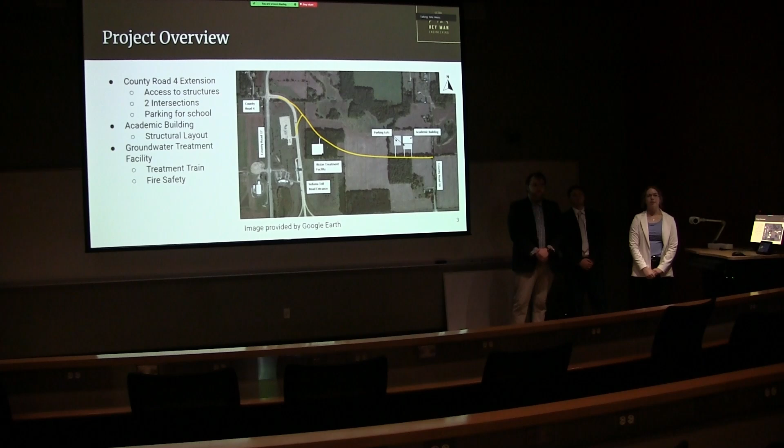And the environmental part of our project was to design a water treatment facility that could treat 1 million gallons of water per day. Included in this design was the treatment train and distribution to the fire safety system on site.

Beginning with the transportation portion of this project, my design was all in regards to the Indiana Design Manual, the AASHTO Green Book, the Elkhart County Regulations, and the Americans with Disabilities Act. So for the Indiana Design Manual, figure 46-2D controlled my intersection design. Our design vehicle was the WB-67. For a 90-degree turn, the turning radius is 125 feet. As you can see on the right side of the screen, figure 53-8 from the Indiana Design Manual controlled my horizontal and vertical alignment design.

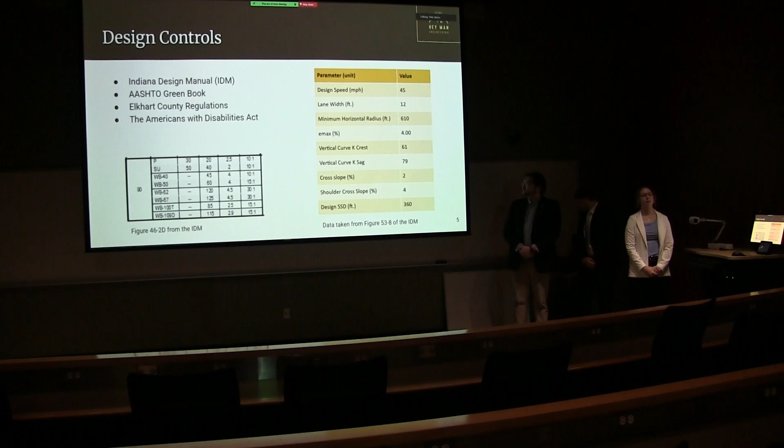Moving into my cross-section, a typical cross-section for this project is a 2-lane road with 1 lane going in each direction. There's a 2% cross slope, which is considered a normal cross-section. I have a 6-foot paved shoulder and a 2-foot unpaved shoulder.

The depth of this pavement was determined using structural number, and for this type of roadway and its considered use, a structural number between 3 and 4 was determined to be ideal, with an aggregate depth of 6 inches, a base asphalt depth of 3 inches, an intermediate asphalt depth of 2 inches, and a surface asphalt depth of 2 inches. We got a calculated structural number of 3.81, which is sufficient for this site. On our shoulders, a surface asphalt depth of 2 inches and an aggregate depth of 11 inches, which is determined to be sufficient for its use.

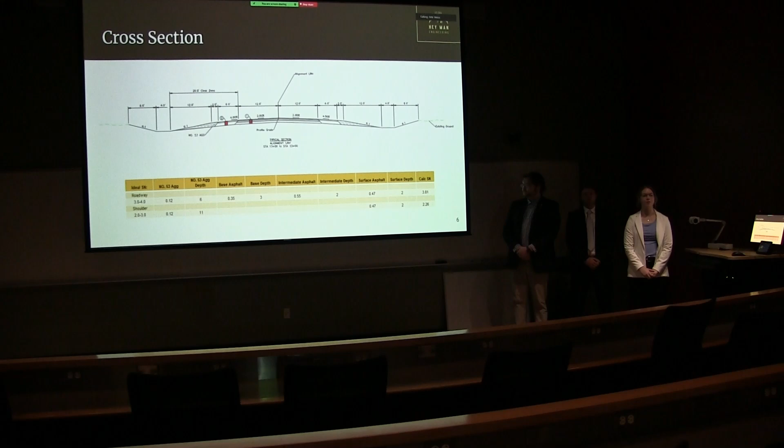And here is a typical cross-section with a center lane. The center lane would be used for turning movements, specifically left-hand turning movements. As you can see with my cross-sections, we also have a 20-foot clear zone, which is included with the shoulder and the ditch for slope. Additionally, I have ditches on either side, which would be used for any roadway drainage. I do not have a water resources member in my group, so any water resources work would be hired to another party by the owner.

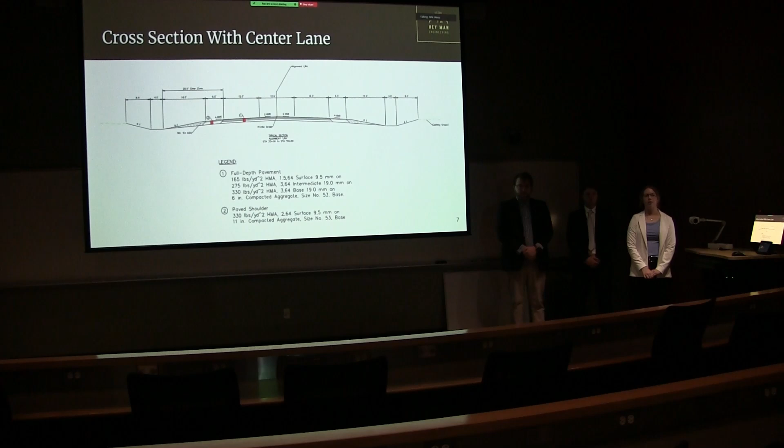So just an overview of what my alignment looks like. Once again, the Indiana Toll Road would be slightly realigned to match my new design. So the intersection meets at a 90-degree angle, and then the alignment would dip below the building. So the parking lots are to the north of the alignment.

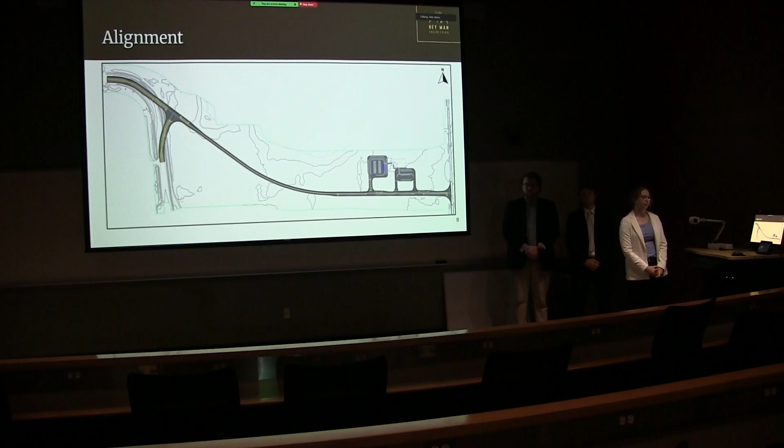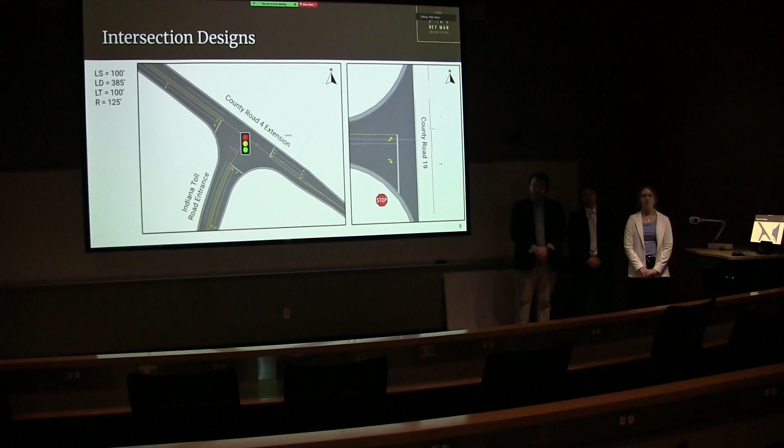Zooming in on my intersection design, the deceleration length was determined based off the design speed for this project, determined to be 385 feet for the 45-mile-per-hour design speed. And then once again, the radius for both of these intersections is 125 feet. For the County Road 19 and County Road 4 intersection, which is a stop-controlled intersection, the County Road 4 extension would be stopping for County Road 19 traffic, as our scope did not specify any changes to County Road 19.

Moving on to my west lot, the number of parking spaces for this lot is more than sufficient for the use of this building, but I wanted to design for a little bit of redundancy and potential growth for this school. So this parking lot has 68 parking spaces and 5 ADA spaces, 3 of them being van accessible.

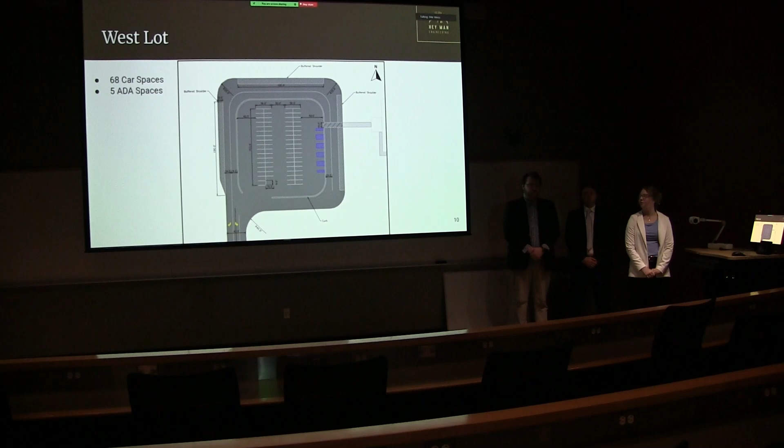Additionally, with this parking lot, the stalls are separated from the moving traffic by curbs to provide safety for the pedestrians and other vehicles. So additionally, during drop-off and pickup times, there are buffered shoulders where parents can idle while waiting for pickup and drop-off for their children.

On the south lot, it is mainly used for staff and bus traffic. It is designed to be one-way, similar to the other one, but these ones are angled at 45 degrees to ensure that there's only one-way traffic. These bus stalls will be utilized during the drop-off and pickup times. Once again, the stationary stalls are separated from the moving traffic by curb.

Moving into my cost estimate, it was estimated using the INDOT unit price summary. My roadway cost, which includes the traffic equipment, pavement, striping, and cut and fill, was estimated to be $3.1 million. My parking lot, which would include both parking lots, which includes pavement, striping, and grading, came out to be $900,000, and with a 20% contingency, the total cost came out to be $4.9 million.

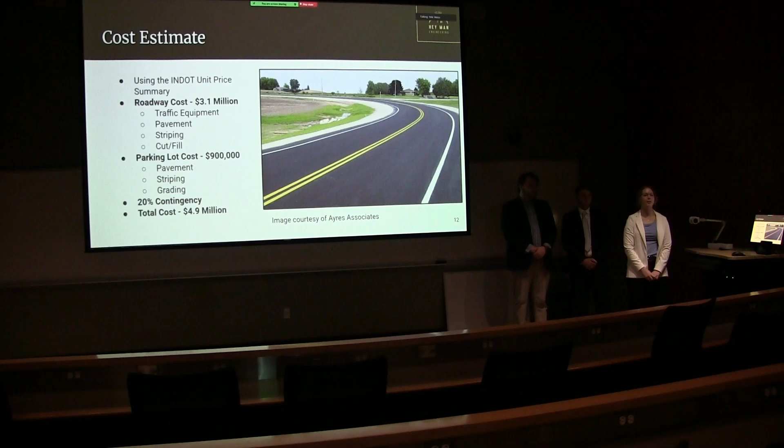I will now hand it over to our structural engineer. Thank you, Leah.

Moving on to these loads that we use, the snow load was the controlling load, especially when it came to the roof load. This was found with the ASCE hazard tool, and then brought down with different factors on geographically where it is, the importance factor, we're designing a school building, not a warehouse. The same thing happened with wind and seismic to account for those lateral loading, because we're in Indiana, we have to worry about the wind, not as much the seismic.

And then those gravity loads, for the roof, we use a metal deck, and the reason it's 20 PSF as the dead load is to account for self-weight of some materials, such as for the future when we start designing for electrical, maybe piping, plumbing, anything that will be up in rafters, we accounted for that. And then the live load is 20.79 PSF, and that's the snow load from that calculation in the last slide. We use 22 PSF in our calculations to have a little bit of a contingency and to be a little more conservative. And then moving under that floor dead load, 50 PSF is our composite deck, including the self-weight.

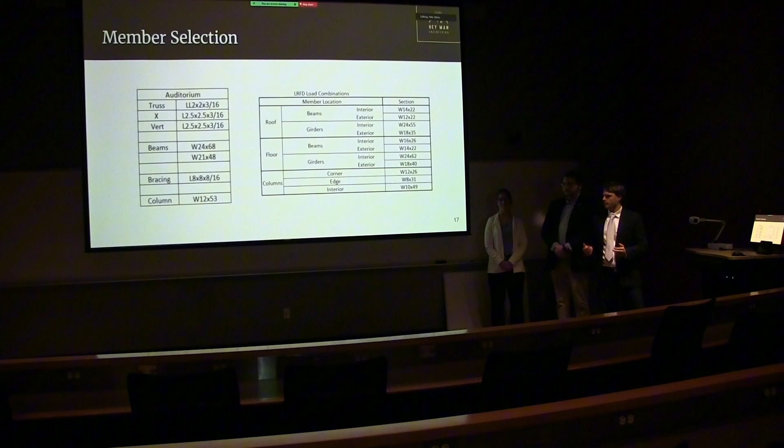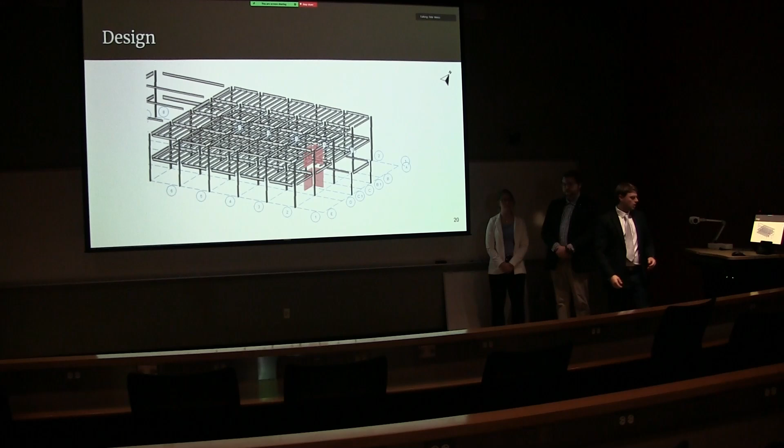There, sorry. This is that truss design. This covers that auditorium, which is a double height auditorium. The reason we wanted a truss is just to be able to distribute that load without having columns going up and down the middle, beams and girders. In doing that, the truss is not very large, but it spans over a long way, and we can prefabricate most of that off-site and bring it on-site, which makes the assembly a lot quicker and more cost-effective.

And also in the top left, we have our bracing that we used. Again, this was the area where it deflected the most because there wasn't as much support as the other parts of the building had. So when we added that bracing, all the calculations and RISA showed that the building was stable after adding those.

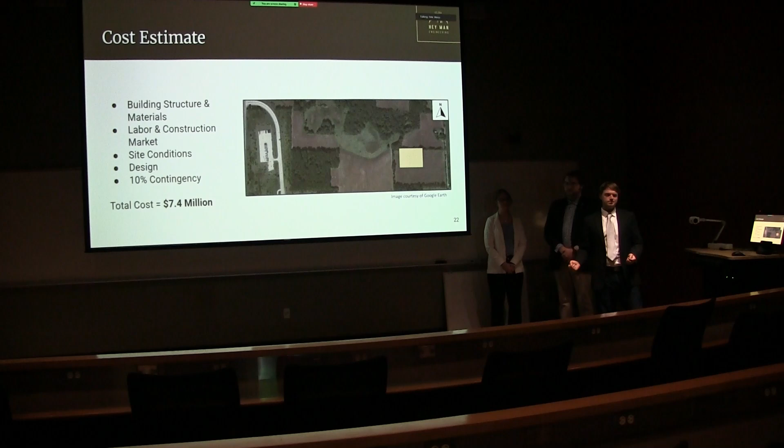Then moving on to our cost estimate, it goes a little more in depth in my report, but this is more of just an overview of building structure and materials, labor and construction market, site conditions, and the whole design, and there's a 10% contingency. This came out to $7.4 million. And with that being said, I will pass it on to environmental.

Hello, as said, I am Jack Larson. I am the manager of the environmental scope of this project. To reiterate, as decided through phase one of this project, I went to design a groundwater treatment plant due to the abundance within the area.

Beginning, I designed a groundwater pump, which would then filter into a rapid sand filtration system, which we'll discuss more in the presentation, followed by a disinfection basin, which will then be stored in water storage. The plan is to distribute roughly around 1 million gallons of water per day to the surrounding area. We'll discuss more about that later in the presentation, where it is then distributed to the schoolhouse as well as to the fire safety system.

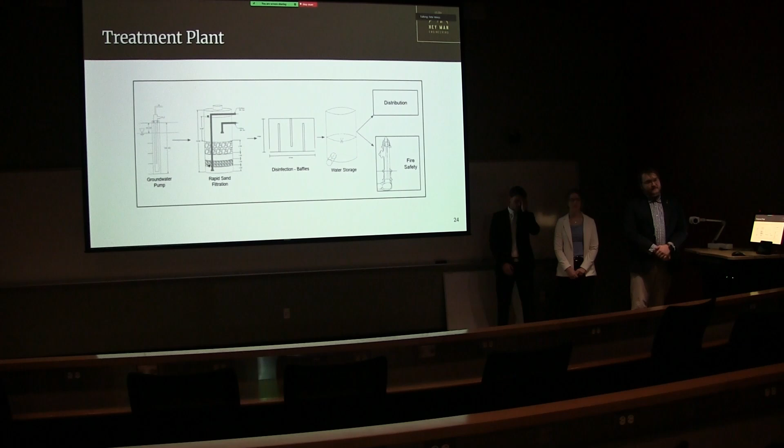These have been designed with codes from the Environmental Protection Agency, the World Health Organization, and guidelines from Elkhart County regarding water treatment and fire safety. Start off with the groundwater pump. There's going to be a total well depth of around 100 feet with a minimum pump capacity of 700 gallons per minute being pumped out of the ground. There will be 2 pumps on site, alternating usage, each designed for the same gallon flow rates.

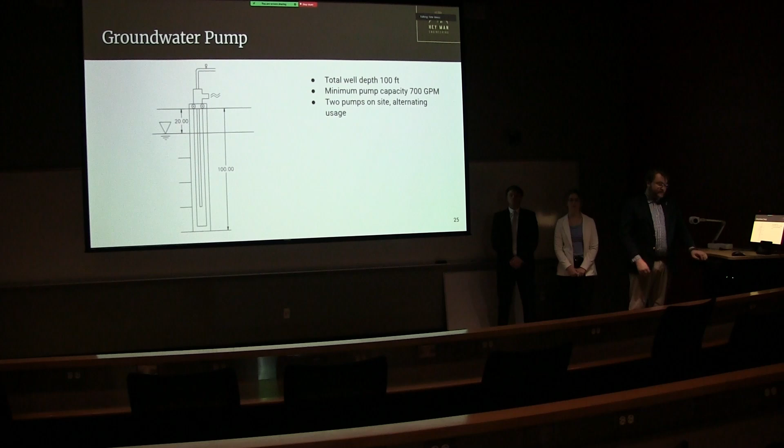Different from the first presentation, originally I had slow sand filtration with activated carbon. However, through my own research and guidance from my advisor, it was decided that a rapid sand filter would be more efficient in the water treatment process. As shown here, it'll be a 10-foot height with about a 5-foot diameter. There will be 3 layers through it that will help to filter out any unwanted chemicals and suspended solids from the groundwater.

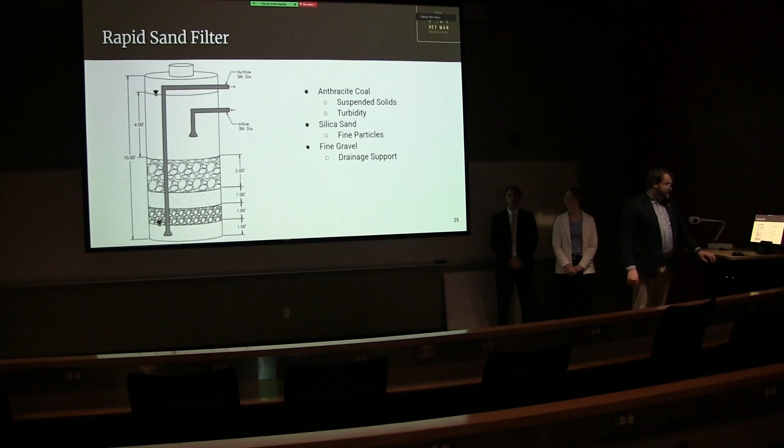The first layer of anthracite coal, 2 feet high, is going to filter out any of the suspended solids and turbidity within the water, followed by silica sand, which will absorb any of the finer particles that are left in the water. Finally, a fine gravel layer, which is designed to be support for an even drainage into the collection basin. It is then transferred over to the disinfection basin with a contact time of about 30 minutes and a chlorine dose of roughly 5 milligrams per liter.

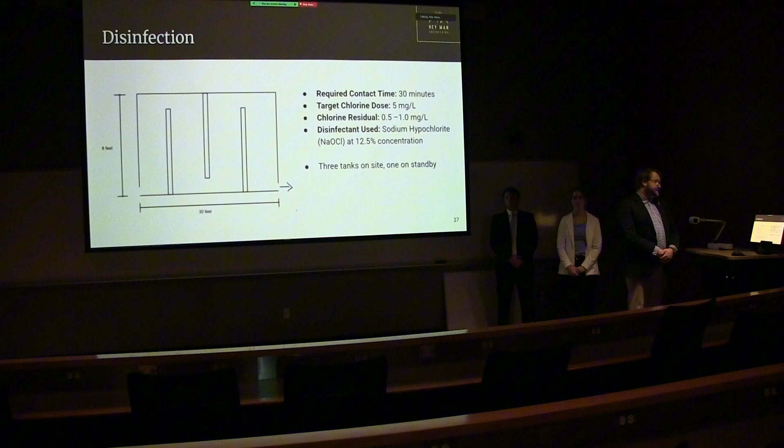It plans to filter out any of the harmful chemicals that could be in the water, such as magnesium or calcium due to the hardness of Indiana water. There will be 3 tanks on site with 1 on standby.

Finally, with the water storage system, there will be 2 tanks on site, each containing 750,000 gallons of water. The water will be moved around to avoid staticness, with the water tanks being alternated in their usage.

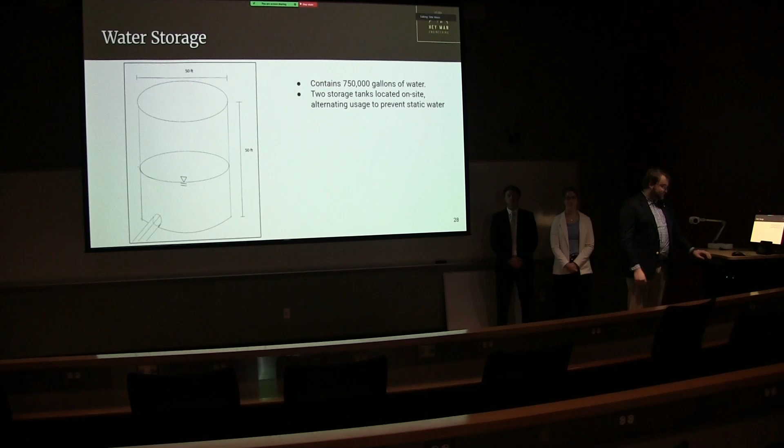Finally, something that was not previously discussed, at least to this much depth in the previous report, was the fire safety system for the schoolhouse. It is designed to pump out 1,500 gallons per minute at 20 psi for a minimum of 2 hours.

With the site approximately 2,500 feet away from the schoolhouse, I designed a piping system created from ductile iron with a 12-inch diameter that will pump the water from the site to the school, as well as a T intersection piping that will go off to the side where it could be opened up with a gate valve, and it will be able to pump the water into the fire hydrant in case of an emergency.

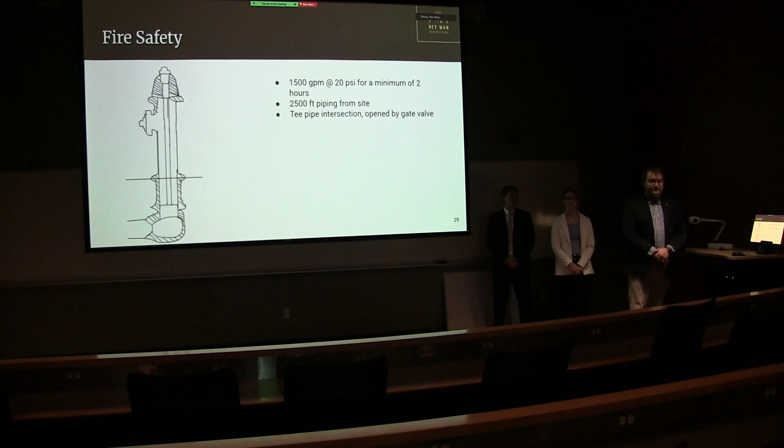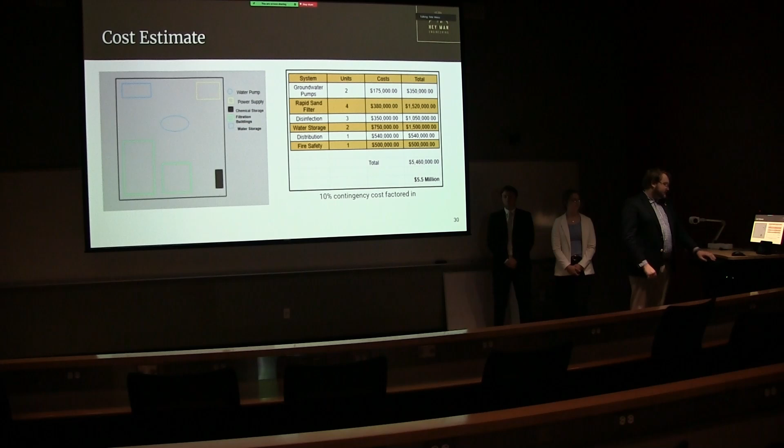Now, on to the cost estimates. I'm looking at a $5.5 million cost. There is a 10% contingency factored into each of the facilities, which includes installation, testing, and designing, as well as the general outline of the plans. Building construction costs were not included in this estimate as that's outside of my scope. I will then pass it on to Leah.

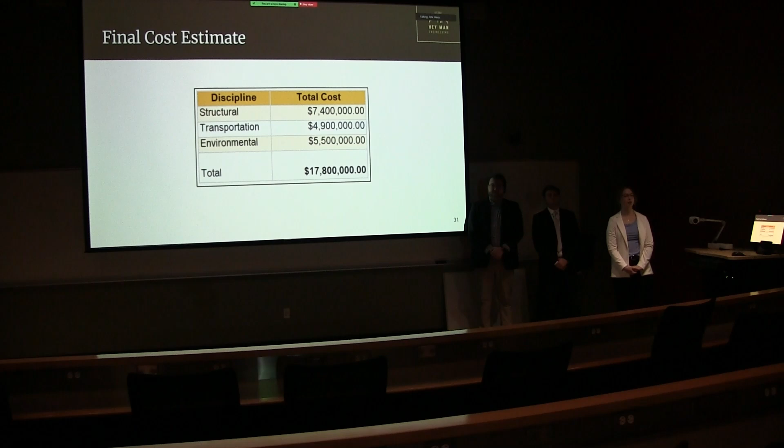Thank you. So with the structural, transportation, and environmental, and each individual contingency, our total project cost came out to $17.8 million. And with that, I'd like to thank you for your time today, and I'd like to open the floor to any questions.

Yes. Okay, start with Jack, I believe. Oh, am I limited on the number of questions? Yeah, let's go 2 questions each, and then if there's time, we'll circle back. Okay. So, Jack, I'll make it maybe 1 for you and 1 for Leah.

So you mentioned that the filtration is to remove suspended solids, and you are using groundwater. Where do these suspended solids come from? From these, it would just be from testing. If there was still a high chance of any contaminants in the water, I just wanted to account for any possibilities. Well, filters don't remove chemicals. Yeah. They remove suspended solids, but where they come from is usually through a pre-oxidation process. And so just to make sure of that.

And why do we need a separate tank for disinfection? This is water treatment, not wastewater treatment. So since you have a storage facility, you can add your chlorine or whatever disinfectant into the storage tanks, correct? Yes, it was for the sake of redundancy, just making sure the water would be safe in case of any contaminants. Okay, thank you.

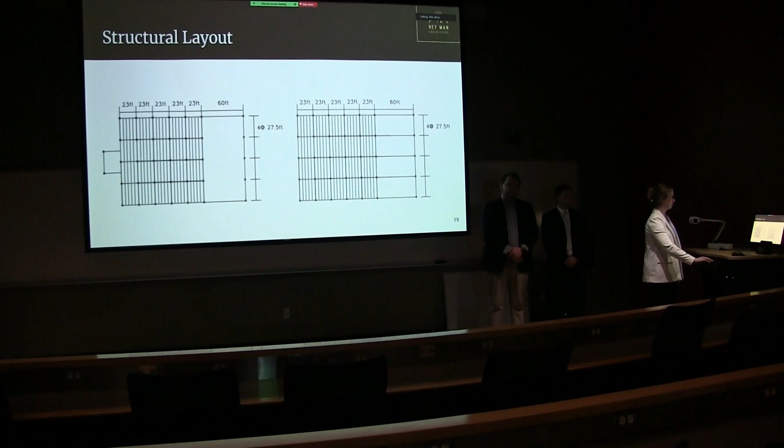Leah, quick question. In the second parking lot layout, I saw there is sort of a large distance, if that drawing is to scale, between the parking spaces in there. Can you go back to that drawing and tell me, because that's the objective of having those parking spaces at an angle, and I see sort of a huge space between the 2 rows in there. Why did you do that?

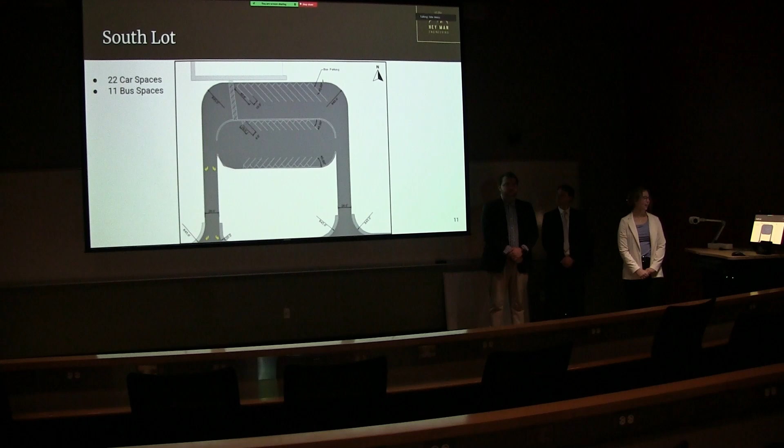Originally, I had them just at 90 degrees in the center, which required that space. And then I already had the radiuses for the entrance and exit of that parking lot design, so I probably should have shortened that. I don't think that the space is as big as it looks. So it's not to scale? Yeah, well, it is to scale. It's just, with the entire design, it's probably about 40 feet between the two, so it should be closer to 24 feet. Yeah, thank you.

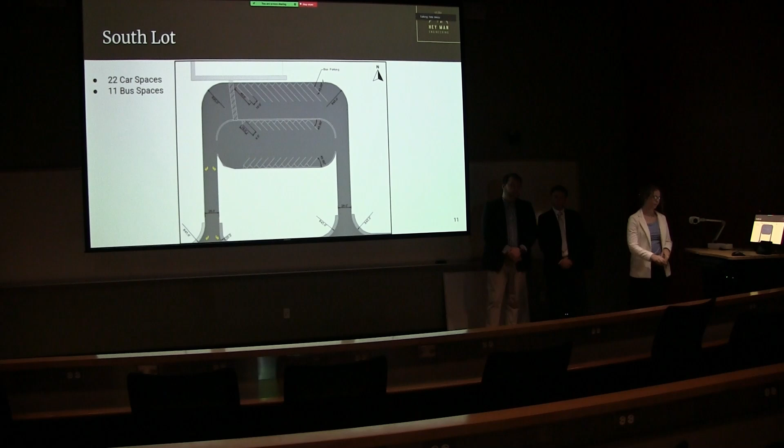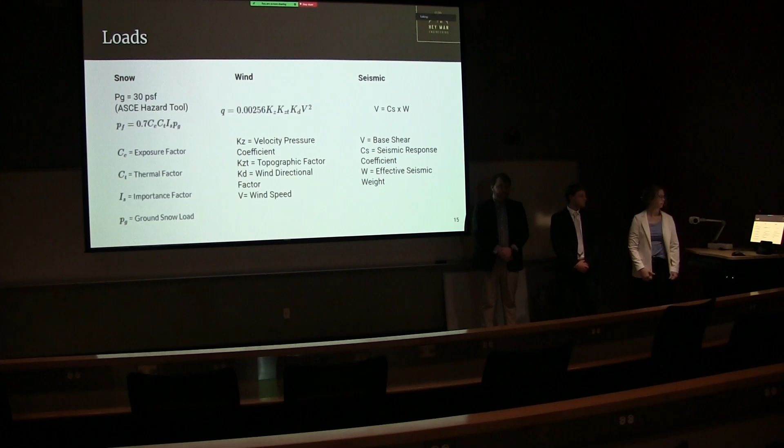Yes. I have questions for Alex. Could you please go to, maybe past this one, number 15, please. Okay, so you showed us here that you have calculated snow load and wind load and seismic load and then compared them, and the wind load is controlling regarding the lateral load. Yeah. But on the elevation, you didn't give us the values of this wind load. Yes, those are in my report. I just had that on the elevation plan as a visual showing you that I accounted for the lateral loading.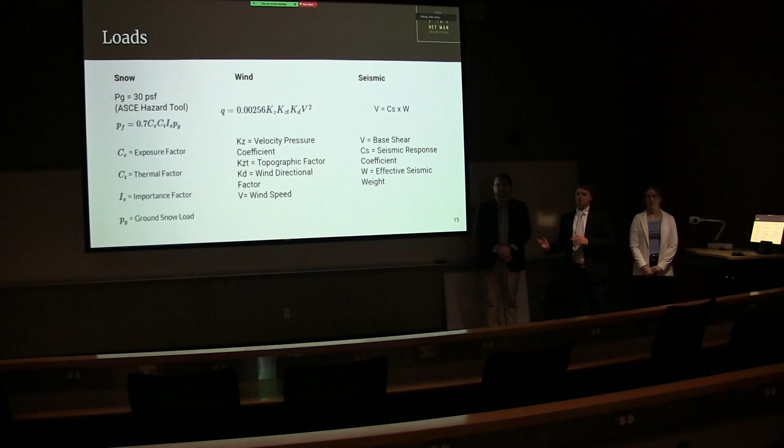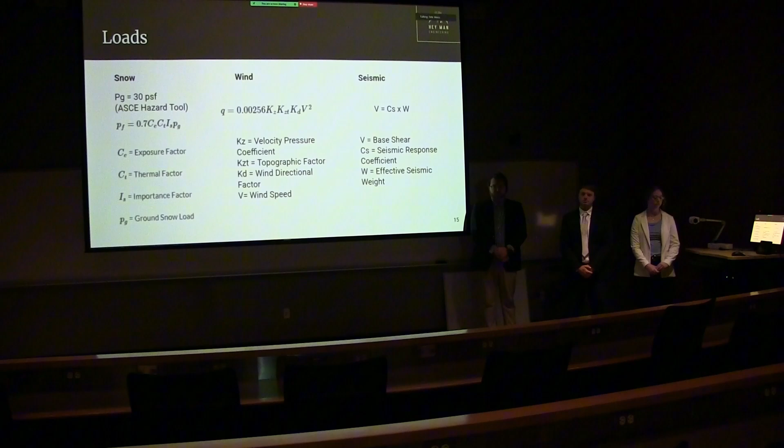But you don't have the numbers now? I don't know them right now, but I know they're in my report when I talk about wind loads. They are. Yeah. Could you go to the calculation of the, yes, this one.

When you say the floor dead load is 50 PSF, did you consider the self-weight of the material? Because you're mentioning that you have like 5 inches of concrete. 5 inches of concrete by itself comes up to close to 60 PSF. Is that okay? Even if you don't calculate the self-weight of the joist that you have used, that's way below. So did you consider anything that I cannot notice here? Maybe not. That might have been a typo typing it in. I'd have to check my calculations again.

And also for the live load of the classrooms, offices, labs, and corridors, all of them have the same? No, I just wanted to show the highest live load. For the classroom it's only 50 PSF, so when I made that area load in RISA, I made sure I used 50 for that and so forth for the offices and labs. Corridors were the only thing that really controlled, and the corridors are like the hallways, so we needed to account for that a lot in the structure itself, because it roamed around the offices and labs, and that controlled a lot of those beams.

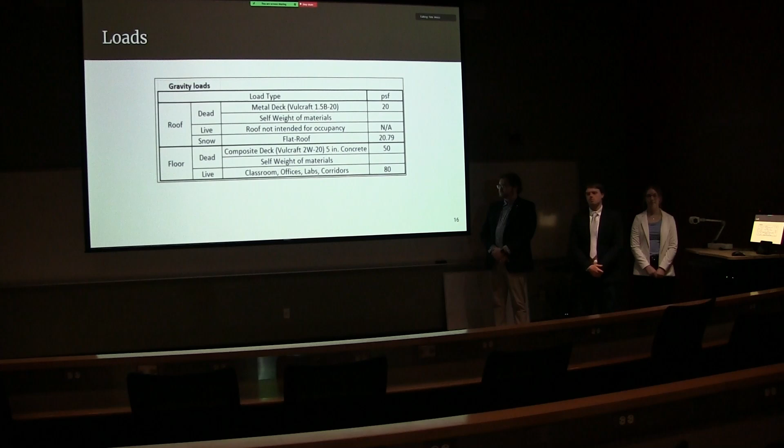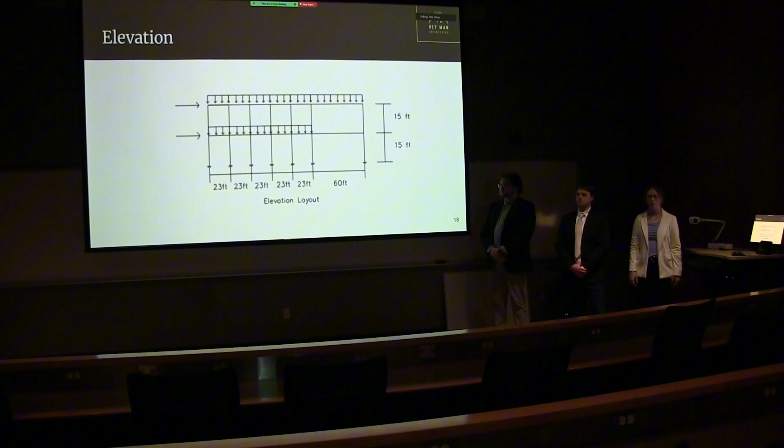Could you move to the next slide, please? The one that shows, I mentioned, you don't also put the numbers for the gravitational forces. Yeah, again, this was just kind of a visual. Okay, so what is the lateral force resisting system? Because you have the wind load, right? So what is the lateral force resisting system in 2 directions? In 2 directions, it was in the X and Z directions. Yeah, what members or what system is going to resist the wind load?

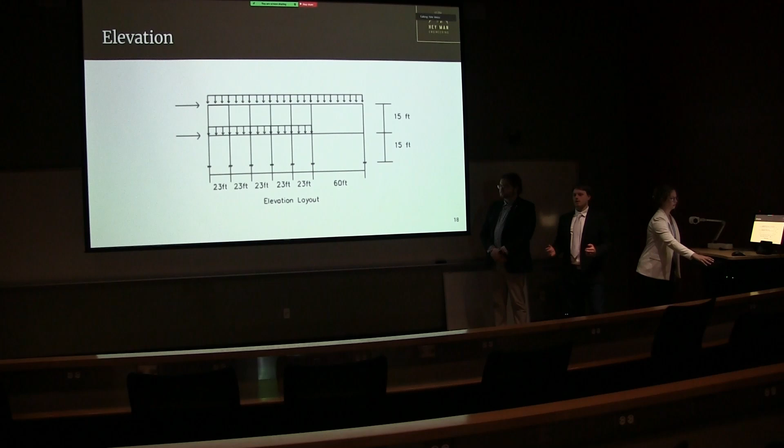When I ran my calculations, looking at deflection, the biggest movement was the auditorium area, which led me to putting bracing there to help from moving too much. In one of the directions, let's say north-south maybe? Yeah. How about the other direction? When I ran it in RISA, that's all that came up in that direction. And that one brace was enough? Because the wind load and seismic load are reversal, so that member should resist both compression and tension, right? Yes. So you checked that? Yes. Okay, thank you very much.

Two quick questions. What is the clear zone? The clear zone is the area off of the roadway that is clear of any obstructions in case of emergencies and vehicles need to go onto the shoulder.

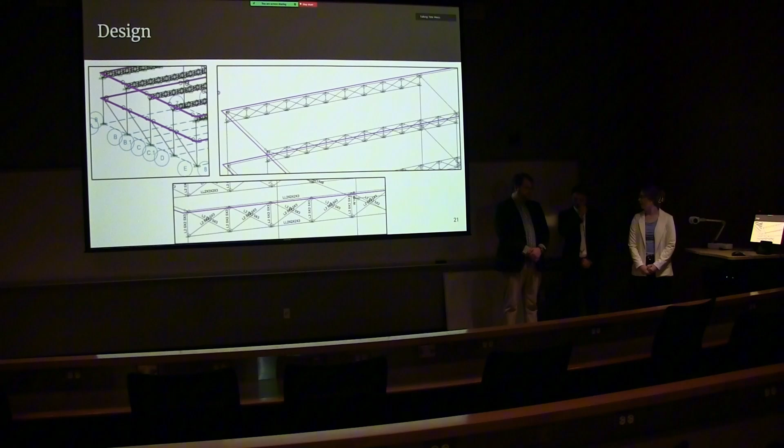Okay. And how did you get your company name? I can't answer this one. I don't know, they just kind of brought it up to me and I was like, oh, that sounds good. Our former project manager, Barrett Church, I think he was just looking towards the future, and the future project manager, Leah Hammond, often mispronounced as Leah Hayman. I think that's where it came from, yes.

So I had a question for the group. I was going to ask about your 20% contingency. It seemed a little high, but the other members had 10% contingency. So how did you come up with your contingency and why are they different? Contingencies for transportation, mine's a little bit higher because I have to take into account traffic control and the changing costs of materials. Using the NDOT unit price summary can only get you a ballpark estimation. The numbers for those materials vary widely, which is why I used a 20% contingency for any unforeseen costs. And for them, a 10% contingency was more than adequate for any unforeseen costs for their design.